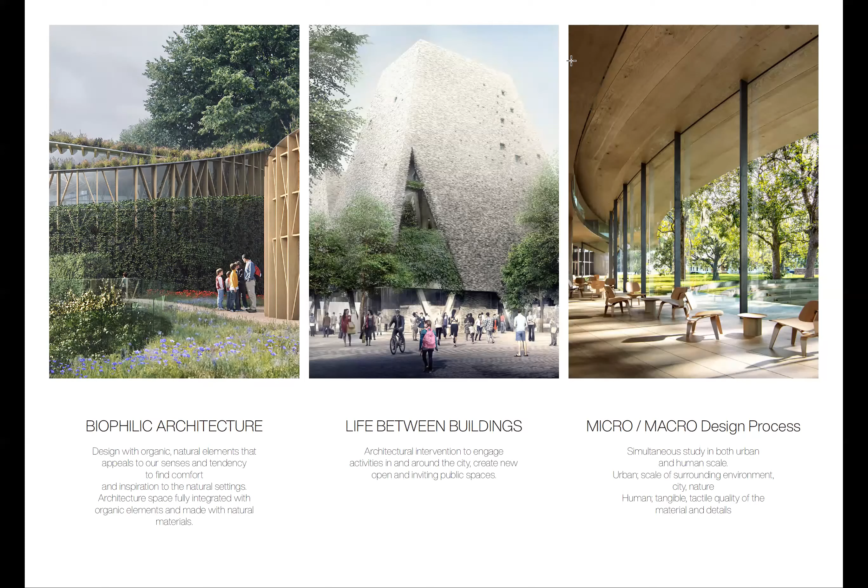The last one is this design method that we've been implementing, this micro-macro design simultaneous approach. We pay keen attention to the architecture design in such a way that it creates a firm link between the surrounding nature or the city and the life that surrounds the project site. That's the urban scale, the larger scale, that we always try to achieve a firm link and relationship to. At the same time, we explore the texture of materials and how they're applied in a very tactile manner. So this tangible human scale is explored at the same time as the concept of linking to the city and environment.

Okay, so the first project I would like to present is the new Hans Christian Andersen Museum. This is under construction as we speak, and our colleague Nicola has been sticking to the site every day and following through this very challenging time.

We've been working with and for the museum crew, which is really inspiring. The museum crew, especially Henrik and Jambo, have been a true source of inspiration in such a way that their high appreciation for architecture and understanding stands out. But how this project started: we won the competition in 2016.

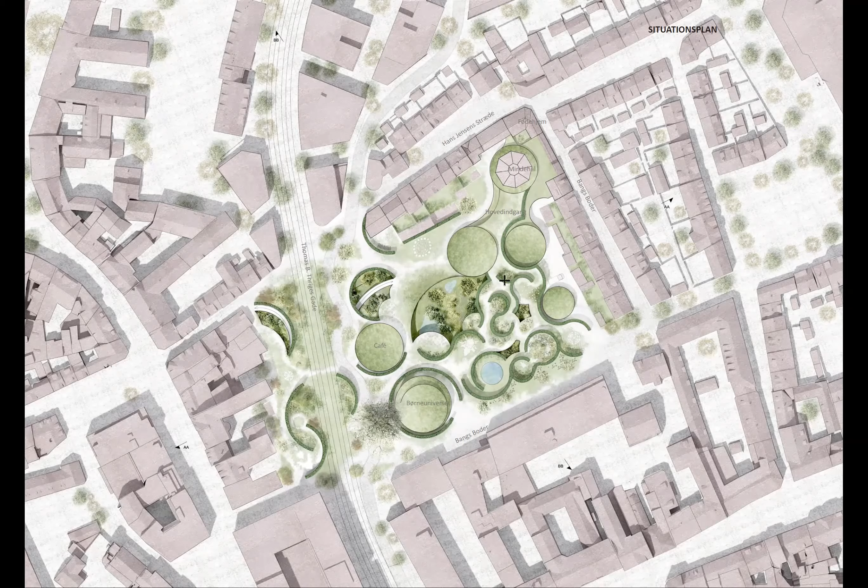So we have separated and tackled this in 4 different garden zones. The first one we call the urban garden, where, as I was explaining earlier, this fast light rail would pass through, with 2 stops - one closer to the beginning of the museum and one towards the later parts. By cutting through, one would have a particular experience of being and passing through the world of Andersen.

There are pedestrian paths and also spill-out space from a cafe and children's room, which are creative facilities for the children, along with bicycle lanes passing through.

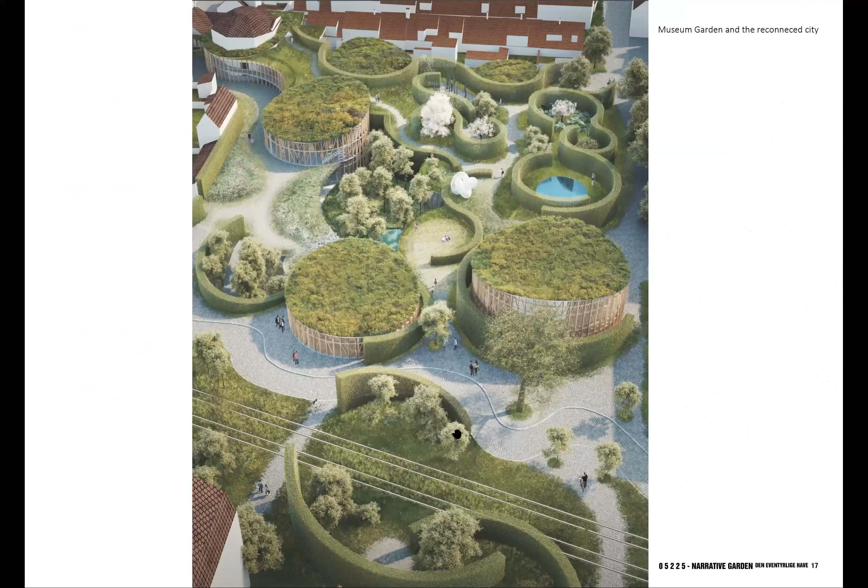And this is the overall image. Although this is a slight alteration to our proposal, we hope the end result would achieve this urban space as we have envisioned.

This view highlights that the overall zone is covered with green. There are small pavilions that pop up, providing functions such as cafe and studio, and a foyer that needs to be accessible from above ground, full of light and good quality.

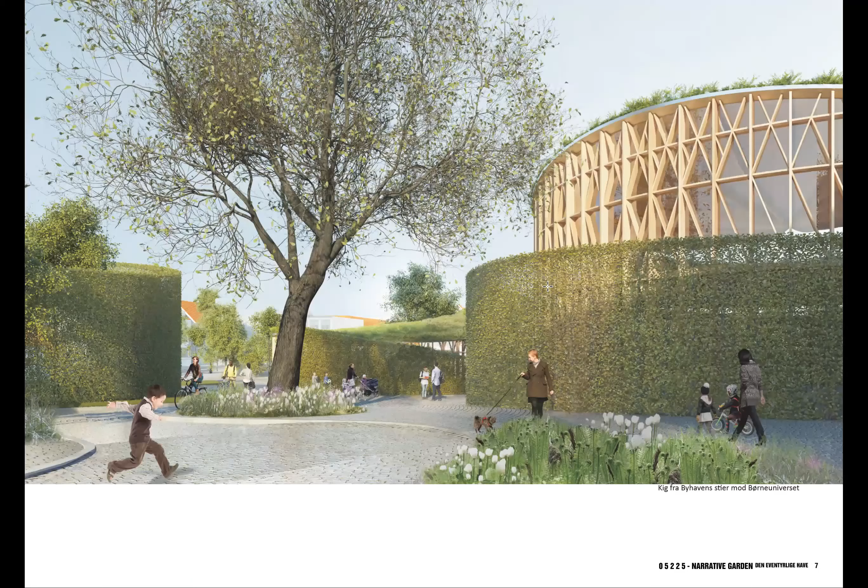This is one of the urban garden spaces where the meandering path plays a part of the experience - walking through the hedges, experiencing being enclosed by them, and catching a glimpse of the architectural pavilions.

The first, the biggest one, is placed at the prominent corner where it's most accessible, visible, and legible to the public. This is open for educational facilities or creative activities, mostly for children.

There are symbolic areas adjacent to the existing trees at the moment. A cafe is close to this path, so a garden view could be obtained at the same time.

And the entrance pavilions are open and draw people in through this two-layer hedge, leading the way to the entrance, which is adjacent to the birth house of Andersen.

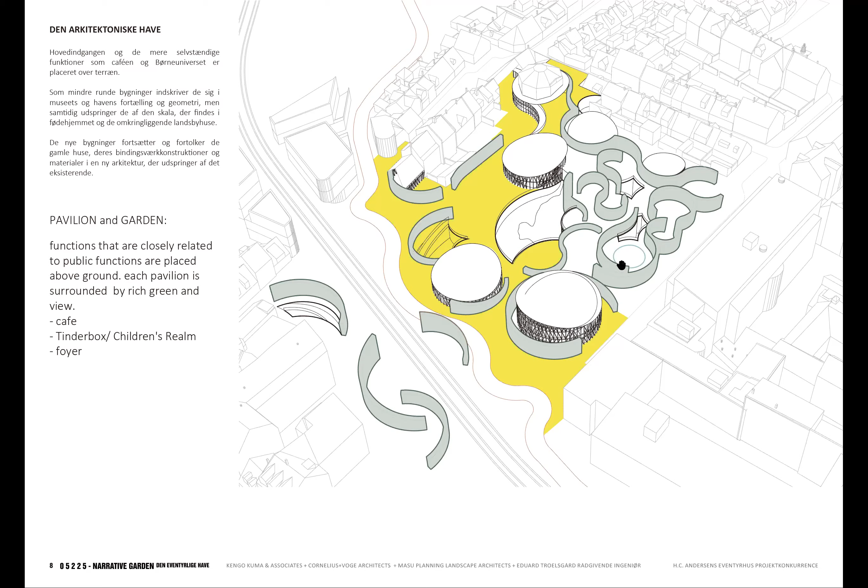So this is the layering of the facade for the pavilion. And one is the scenographic - what we call the scenographic garden.

This traces the exhibition space underneath. So again, there's this play of mirroring, or duality of opposite matter, cut and divided by the plane of the ground - above ground has a hedge that creates a maze-like space.

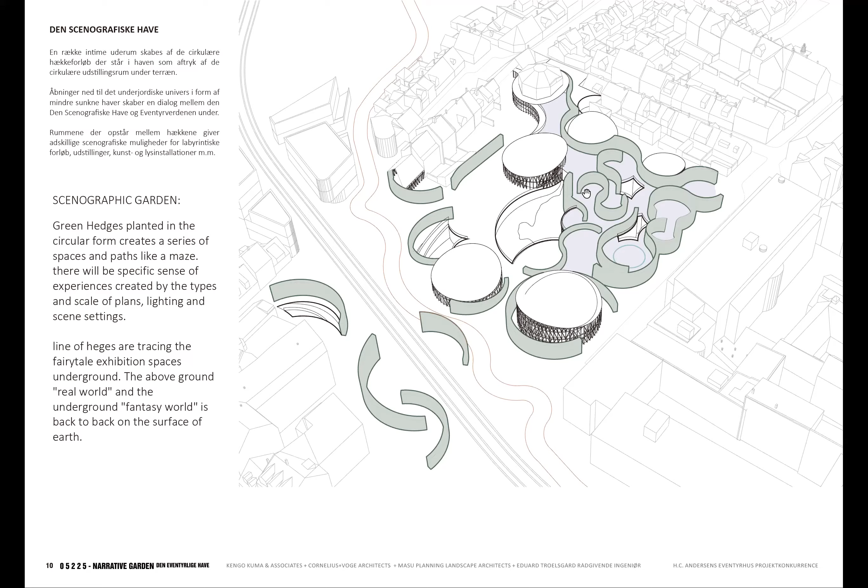Through some small openings, the aperture of the skylight, one could have a glimpse of the fairy tale world underneath. This is the effect of the meandering path.

The last is the secret garden, and this is the portal, or the openings, that connects above ground with the real world versus the fantasy world - the fairy tale world underneath.

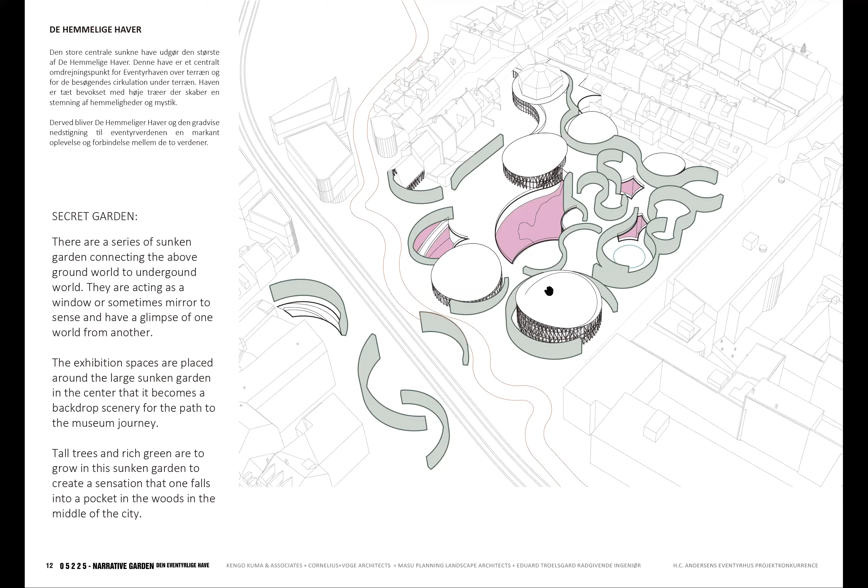This is the view we imagine could be obtained some years later when the trees are fully grown. Of course, landscape and garden projects always anticipate growth over years and years.

So the effect is this sense of being surrounded, intimate, secluded, and the visibility from above ground into the space is a bit more controlled. This creates a sense of secret garden that becomes a background to the fairy tale exhibition areas.

Very quickly, how we go about creating the volumetric and planning: with the idea of the exhibition designer, Event Communications from London, they have this concept of suppressing all exhibition space underground, which requires a lot of heavy scenographic settings like lighting and sound.

It does make sense to have that underground, with this concept of duality creating the world of fairy tale versus the real world.

So we definitely strive to follow that concept of suppressing or creating the underground world that immerses, while remaining with the pavilions that have direct access, such as the cafe, tinderbox, and the entrance pavilions.

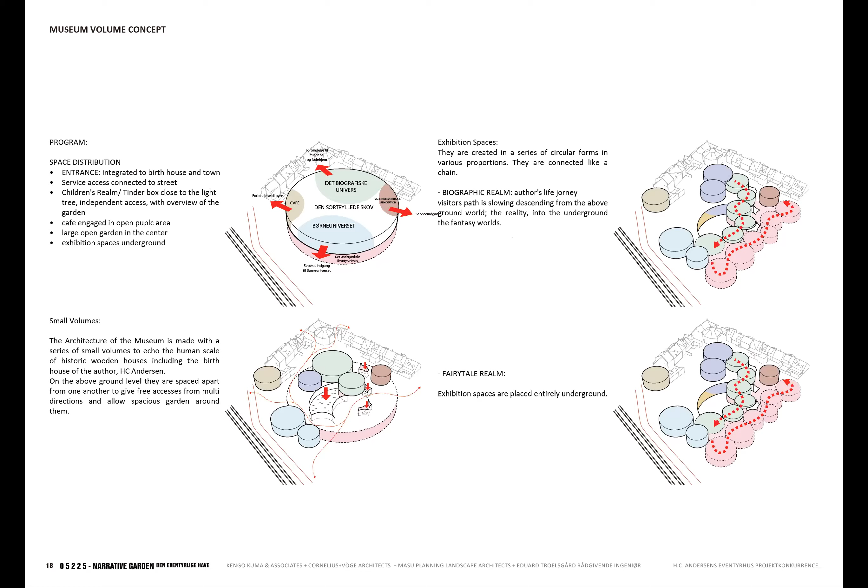What we thought would be really exciting is taking this concept of the biographic realm and the fairy tale realm, created by the museum and exhibition designer. The biographic realm is where visitors gradually descend and reach the underground world - a slow transition from the real world to the underground world. This is much about the author's life journey, experienced through meandering paths between the exhibitions.

So for the gardens, it's not just for the purpose of creating this spatial experience, but also with the full intention of offering the public or the communities a quality space - so they can come, have lunch, or just spend a day to play. This needs to be a garden where spontaneous activities could happen, offering a comfortable space for a daily stop.

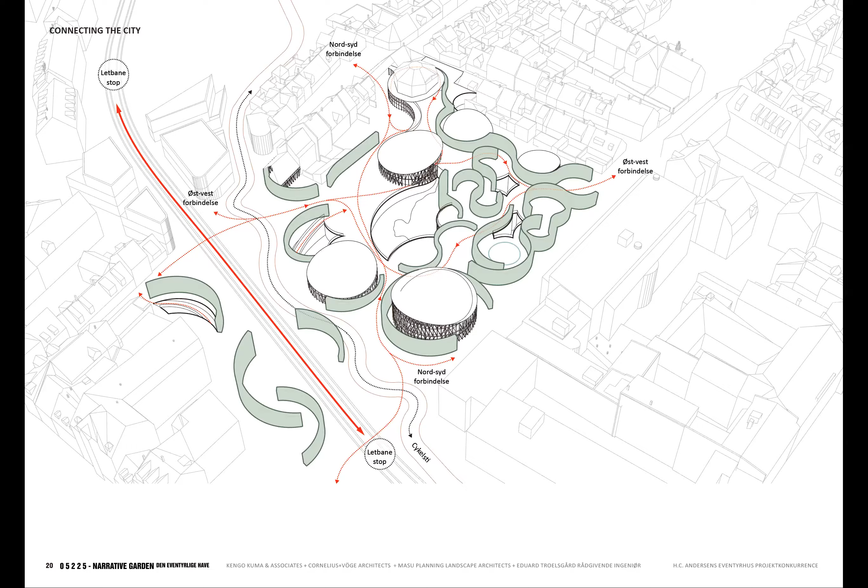So this is the current plan that we are building. What is particular is that the birth house is, of course, the beginning and end of the whole journey. Starting with the foyer, receiving the visitors, one would start with the exhibition space and visit each one by descending through this meandering ramp. Each one of the exhibition spaces is composed of or enclosed in a circular form.

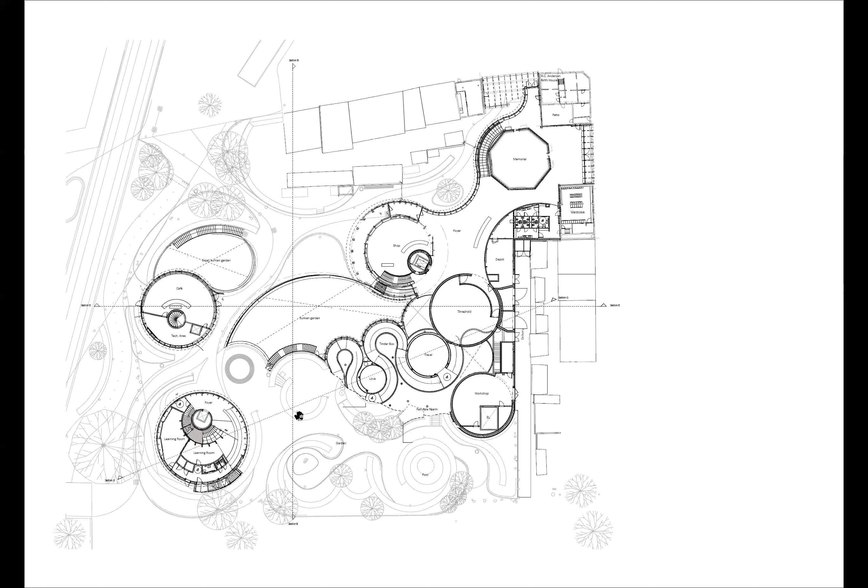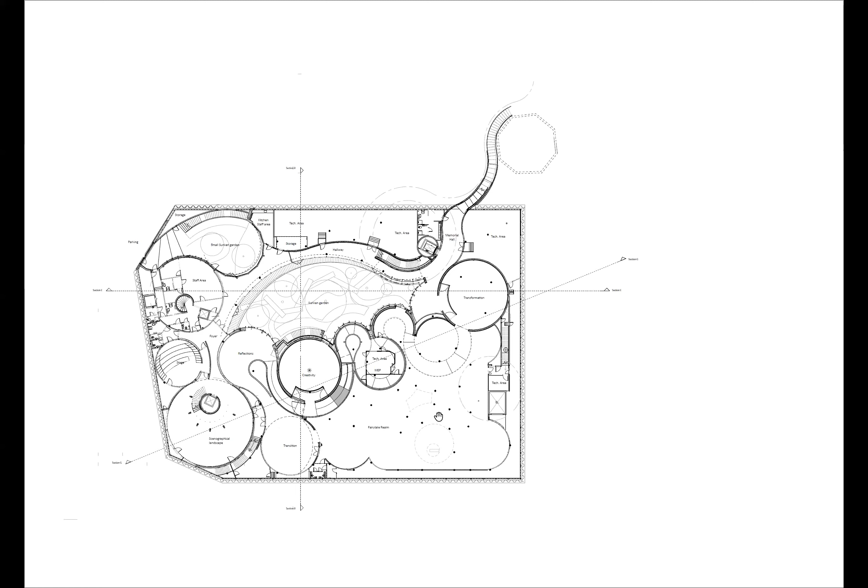So this is the view to the exhibition, the foyer pavilions and inside of the foyer. This is the full plan that shows how the exhibition spaces are composed. So there's the gradual descending through the ramps, going into each one of the Biographic Realm exhibition spaces. Once you land on the bottom of the underground exhibition space, the world of a fairy tale just expands and opens in front of you.

We just wanted to share some of the photographs that we thought start to become really interesting. The project is under construction right now, and we can see the series of columns, but the meandering paths give an effect of being in and out of one space and into another. This topography of how the space gets lower and descending, and to capture this within the circle - the exhibition spaces are something very particular, and we're quite excited about the effect of this walkthrough path experience.

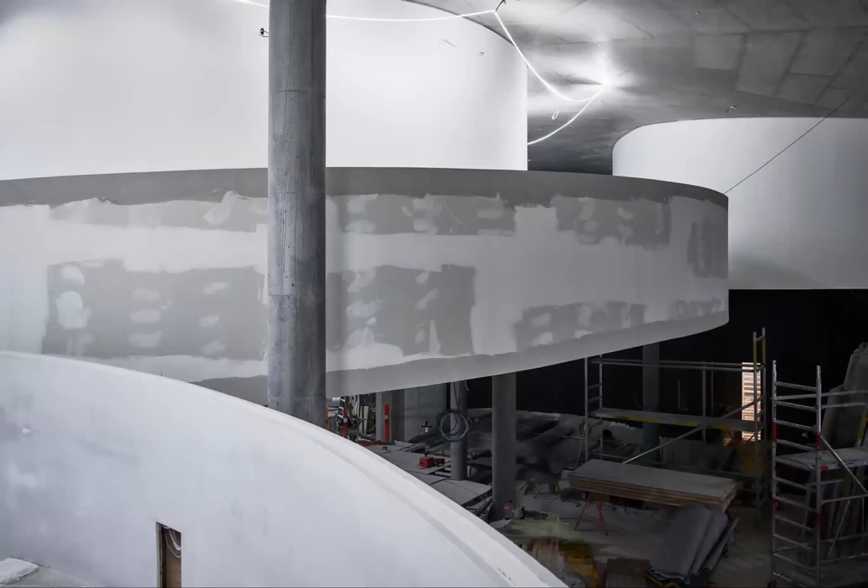The facade concept - we have been inspired by the surrounding buildings, the timber buildings that have these diagonals. So we implemented this concept of looking into the tradition and morphing it in such a way that it gives a more organic feeling, creating patterns in the form of a facade in architecture. The diagonal actually gets used as bracing to stabilize the whole structure and the facade, so it's functional as well. This is the result of applying these design patterns.

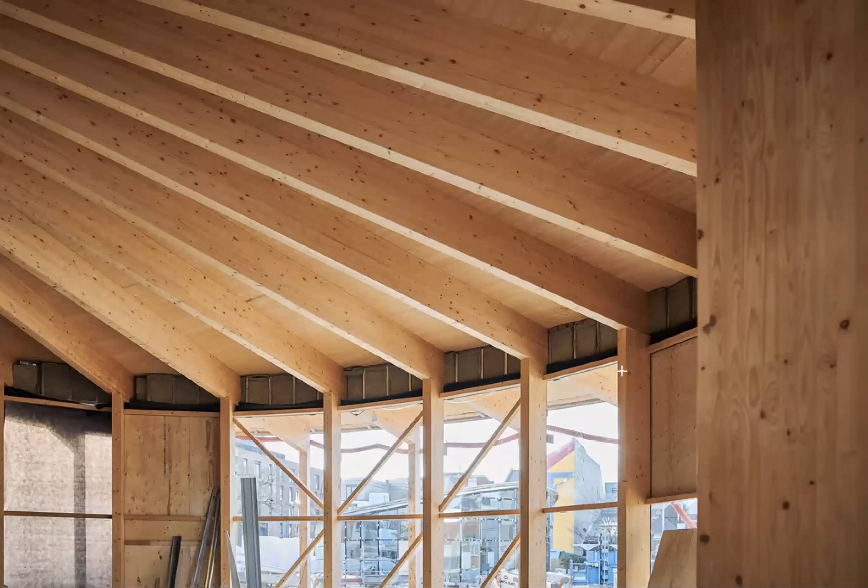This shows photos of the current ongoing construction. An overview to the cafe, and from the cafe one could obtain a surrounding view towards the urban side, as well as this three-dimensional rising ground and the meandering paths of the hedges.

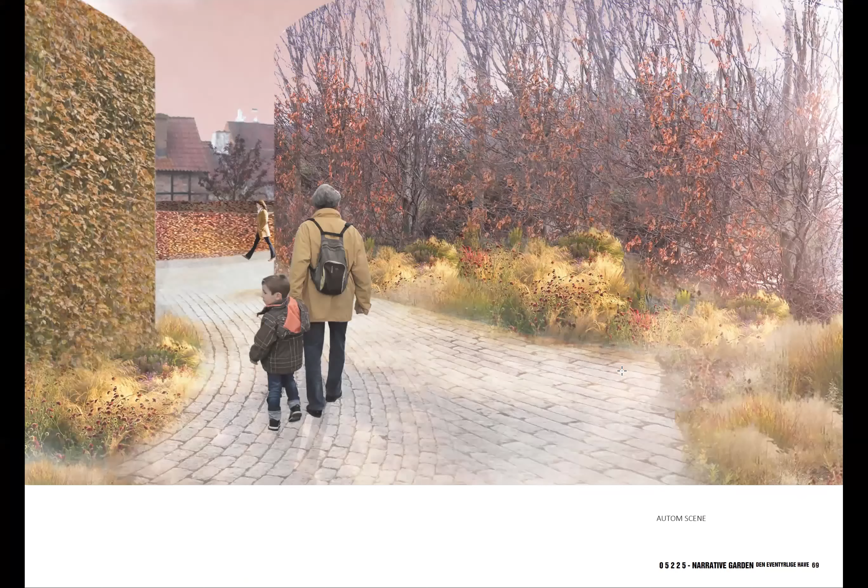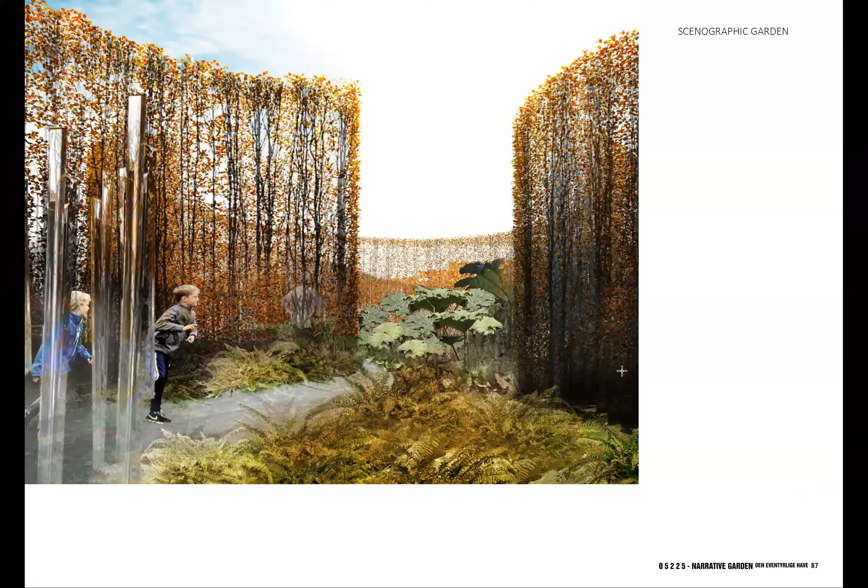So the hedge would transform itself through different seasons. In autumn, it starts to become bare and changes its transparency. There's some play with scale, giant plants, and so on, which also reflects some of the stories of Andersen. Yeah, so that was that.

Here, the element we got to work with is water. I believe this is one of the most attractive materials any architect can work with. We have tried simultaneous explorations from the very beginning, a micro-macro approach, where we really start looking into spaces in design that appeal to our senses - working with steam, temperature of water, reflections, and shadows, and how it will react with light. All this was a central theme in coming up with and deriving the architectural form.

And water, the site suggests such a significant presence. This marks up the important landmarks such as Opera House and theater, and historically it became a key point of the city's development. And Denmark has very deep connections and cultural engagements with the water.

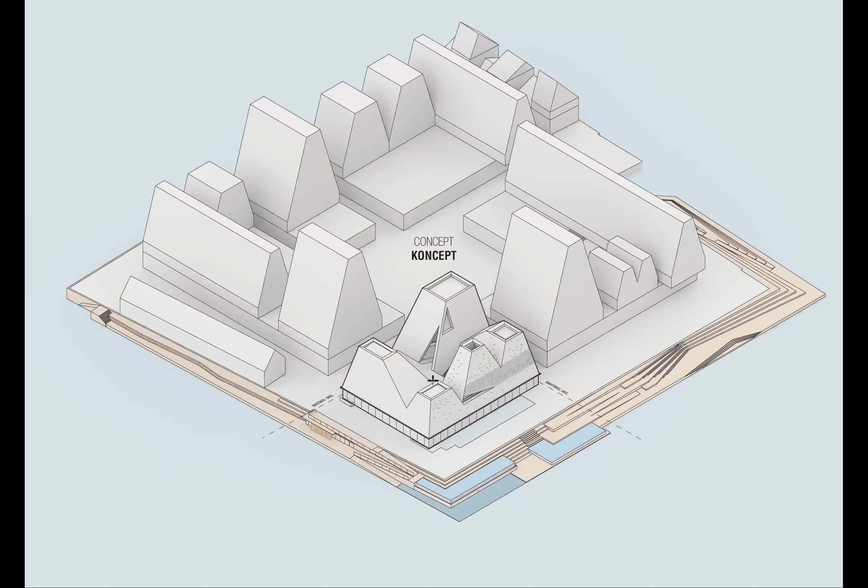Starting with the concept, this small plot was given to us to design, situated among the master plan designed by COBE, Danish architects. Our facility is situated in a corner, a very good corner surrounded by water, so our aim was to really take full advantage of that.

One design guideline put forward to come up with this shape is the sloped roof, which is in close link to our surrounding buildings, the traditional Danish architecture. So we got to play with this sloped roof and the walls.

What we wanted is a distinctive presence by having this aggregation put together in such a way that this facility suggests no front or back. It's all multi-directional and accessible through all four sides, and we have an opportunity to play with different proportions that match the activities underneath.

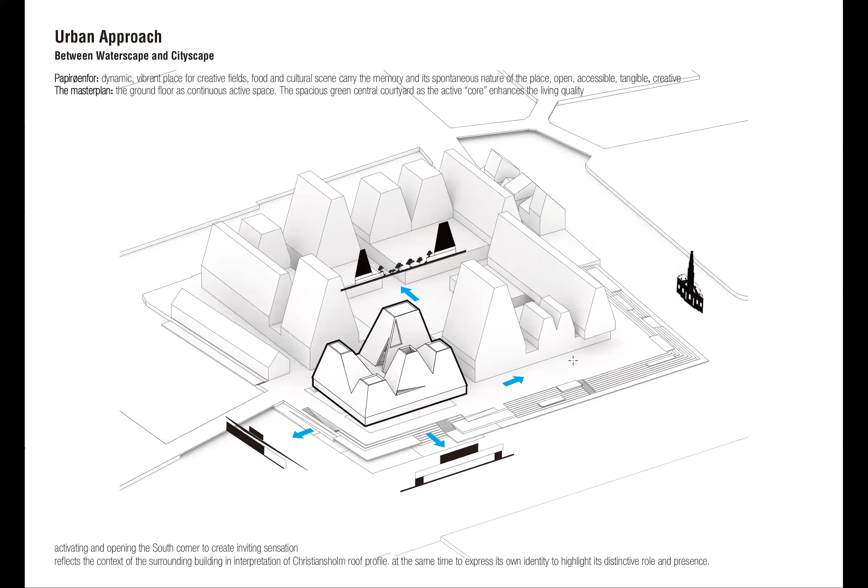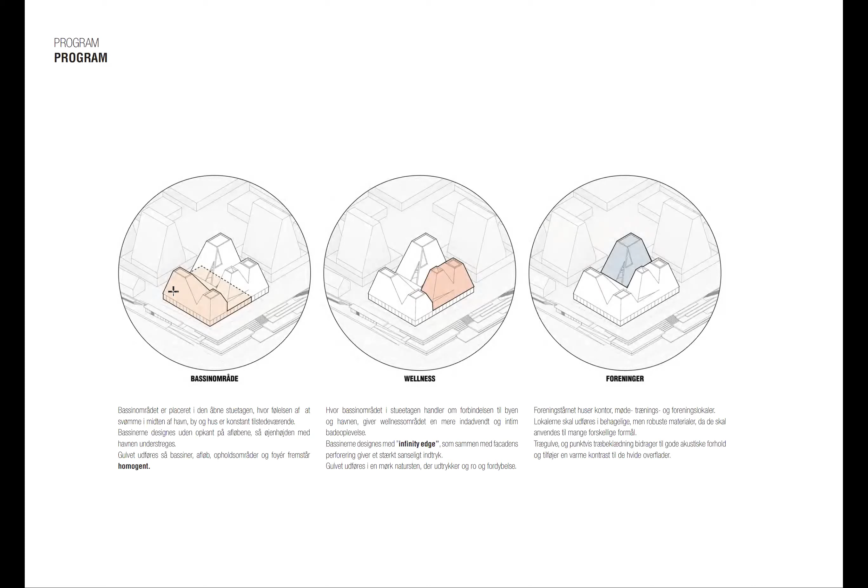Being surrounded by these two open corners, the ground floor plane is fully open to obtain a panoramic view towards the harbor. Enlarged water surface activity spaces are created on the ground floor. These two cones respond to the lengths of the swimming pool, the exercise pool, as well as the shallow pool in front.

Wellness is at the elevated level on the first floor, where it's more secluded, enclosed, and the views are framed towards a certain direction. The last is the association zone, where sports-related or culture-related activities call for residents of the community, people who live in the city, to participate.

This one is the only one that has multiple levels, and it's pretty tall. This is in response to the scale of the adjacent residential buildings.

The profile of the islands and the corner, being at the corner of the site, the master plan suggests a green courtyard that gives a really nice quality to the surrounding commercial and residential buildings. We wanted to respond to that corner and start conceptually this approach of the ripple.

The interior space gets expanded and dissolved into the surface of the water, and on the opposite side, to take the water into the ground floor activities.

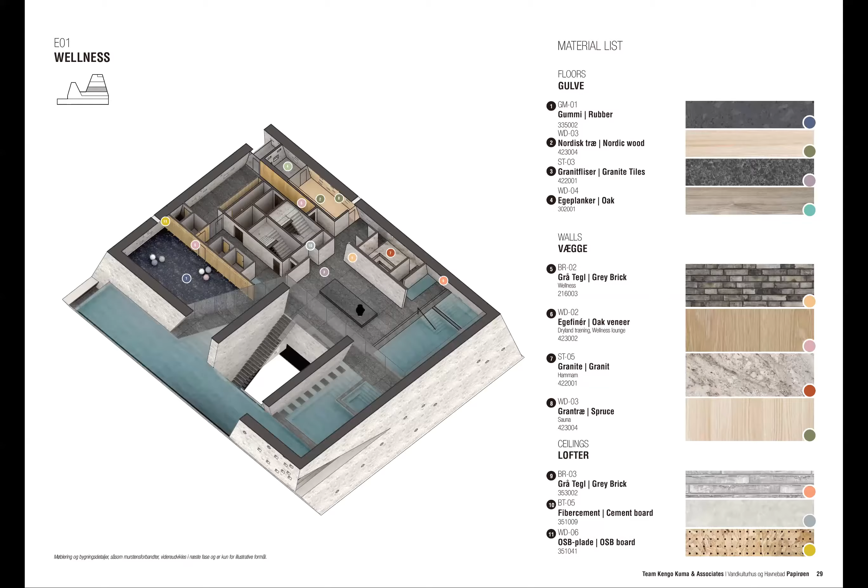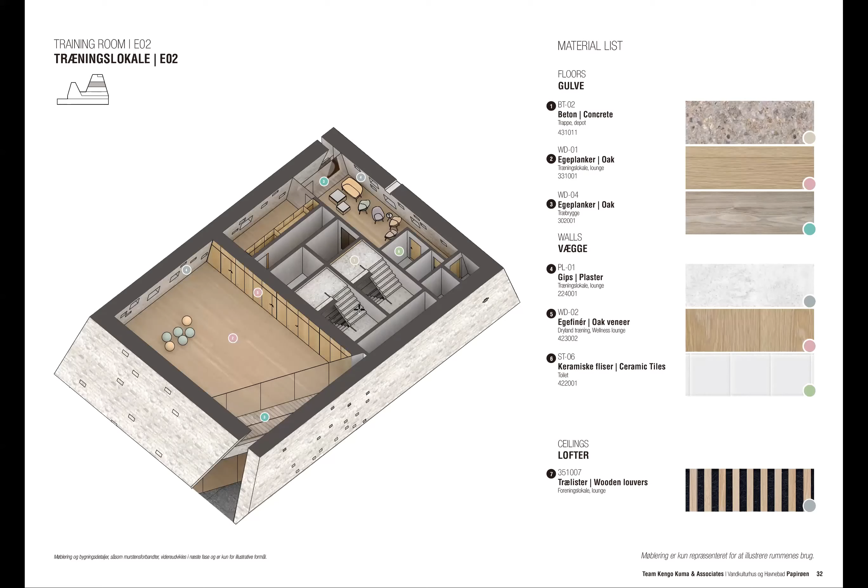This is a view from the top of the association cone, the highest cone. That's the only cone with floor slabs and programmatic floors, all for association clubs related to water. Here you can see one of these floors, a training room, with this terrace that allows access and viewing connection with the rest of the building. It's always inward, outward looking, this interplay.

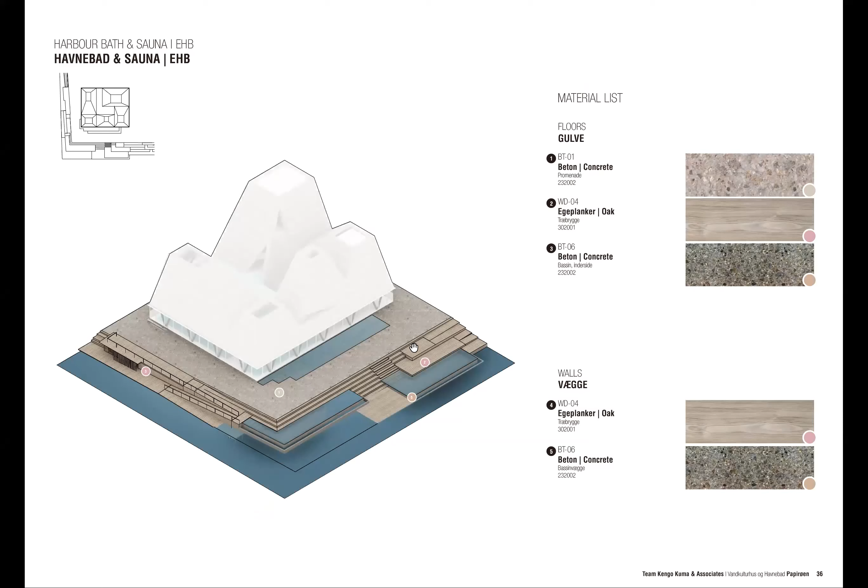The last portion is the harbor bath and sauna. The intention is that, as it's very popular for Danish people to have this harbor sauna, the sauna is an integral element of the landscaping. There will be a series of platforms and slopings, and the sauna is tucked underneath. So the sauna is located in this position, where one can walk on the extension of the roof, approaching the side of the water.

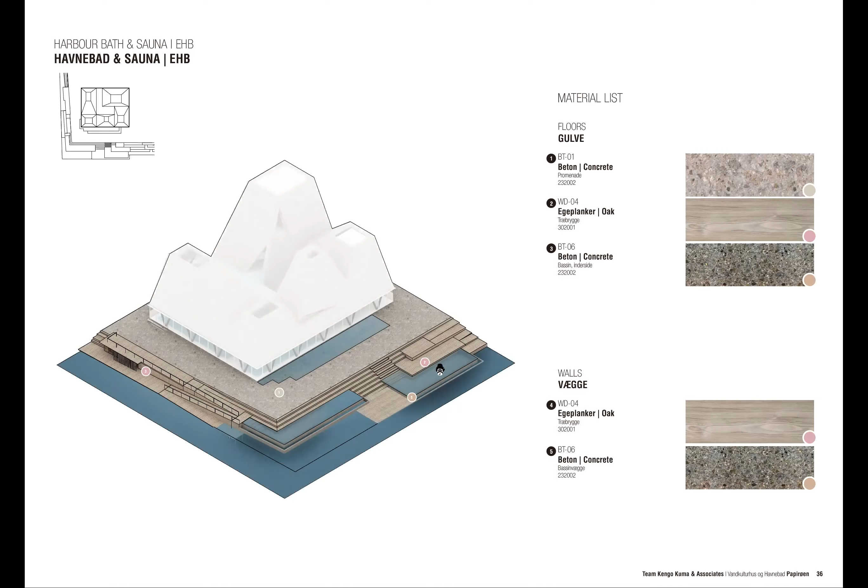This is accessible to the water of this harbor bath, with a series of bleachers and platforms. By putting it in the lower levels, it could still obtain this very clear panoramic view from the exercise pool inside, expanding out towards the harbor. This is the effect, a view from the sauna to the opera house. And this is the latest model that highlights this intent.

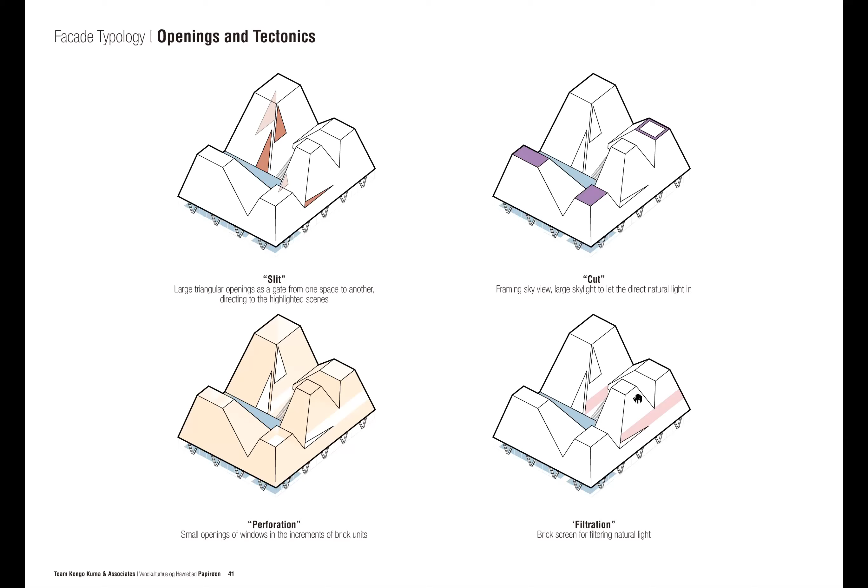We have some typologies that have a skylight as a cut and slit for marking the threshold, moving from one space to another. There's a screen facade effect that filters the light very gently. All this right now is developed with the idea of a brick facade.

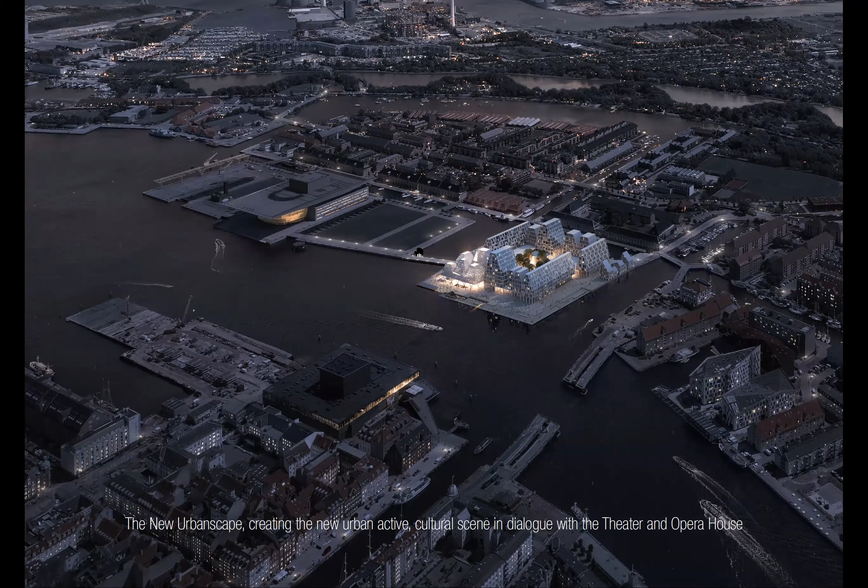So this is the bird's eye view. You can see it has this marking, in hope that this would signal the presence of the new Papirøen master plan residence together with our water culture house. This creates a new dialogue between the opera house and theater. As we speak, Cobe has just won the competition to design these beautiful park ideas. Right now it appears vacant, but this will be filled with greens and seasonal changes. It's going to be quite unique. We believe that together with this water culture house, it would create this new waterfront scene in the city of Copenhagen.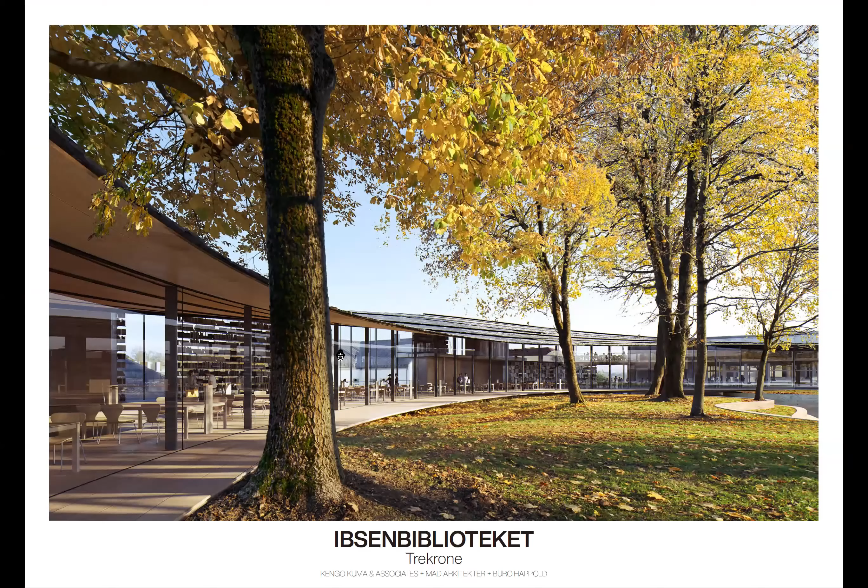Okay, so the Ibsen Library. We again started looking deeper into the writings and literature and how we are to tackle and implement the quality of that, making a link between architecture and literature. There are recurring themes - we started with the silver vein, which is also how we started making this whole architecture as the hub or the network, this running flow in the architecture planning. At the same time, recurring themes in Peer Gynt, for instance, these crowns and trees that symbolize verticality, unattainable goals, and so on. That has been considered in the planning aspect, as well as how the architecture would present itself in the city, making a new intervention together with the activity around.

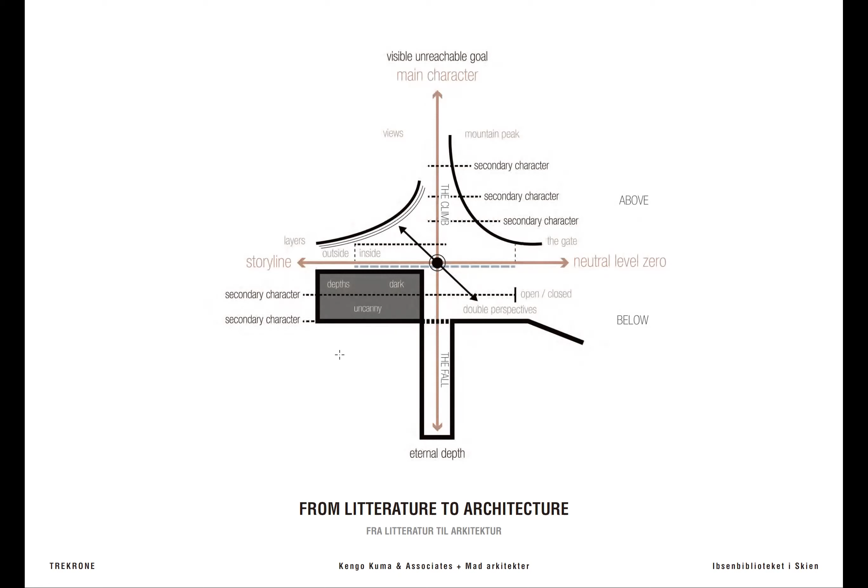Mark: Just to pick up on what you were saying, and also what we were talking about for Andersen - obviously the greatest source of inspiration was jumping from the literature and how this can be translated into architecture, not in a literal sense, but reinterpreted. The Ibsen universe is so filled with all these different elements - the ambiguity, the high climb, the downfalls, all the different characters, the mountain peaks, the double perspectives, the highs and lows, the compression, the cave, the borg. In a way, we try to extract from this what can be translated into the building - the falling heights, the compression and decompression, the horizontality and the cave light. That's something we'll see in the development in the next pages.

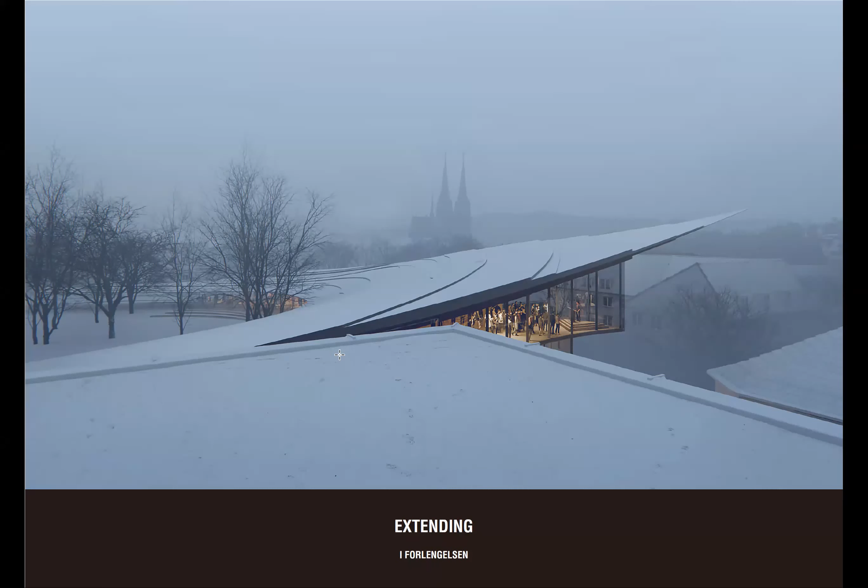Yeah, so this is one of the images that highlights the face of the library towards the city side. You can see it in close relationship to the silhouette of the churches behind. This particular setting in snow gives a warm light leak through and gives a stage-like presence towards the city.

So this is one of those projects where the form has really derived from a close analysis of the site, in relationship to the city and to the surrounding facilities. The Ibsen House was one of the main focuses in deriving the form of the architecture.

So in the first site visit, what we did was walk around and see the flow, how one approaches it, how the visitor approaches from the city side, from the other ends, and so on. We made traces of this movement.

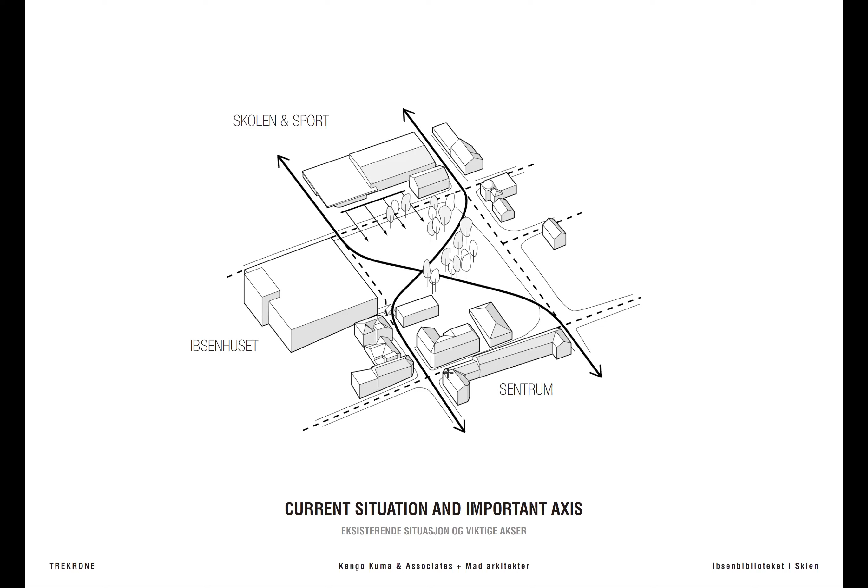This site also has very beautiful trees that make the park so special, providing foreground and background for a perfect library setting. Right after the site visit, we went to the cafe and started doodling on how to frame the library, how it could take its form by preserving the maximum amount of trees, and to create a firm link with maximum openness and transparency from the library to outside and outside in.

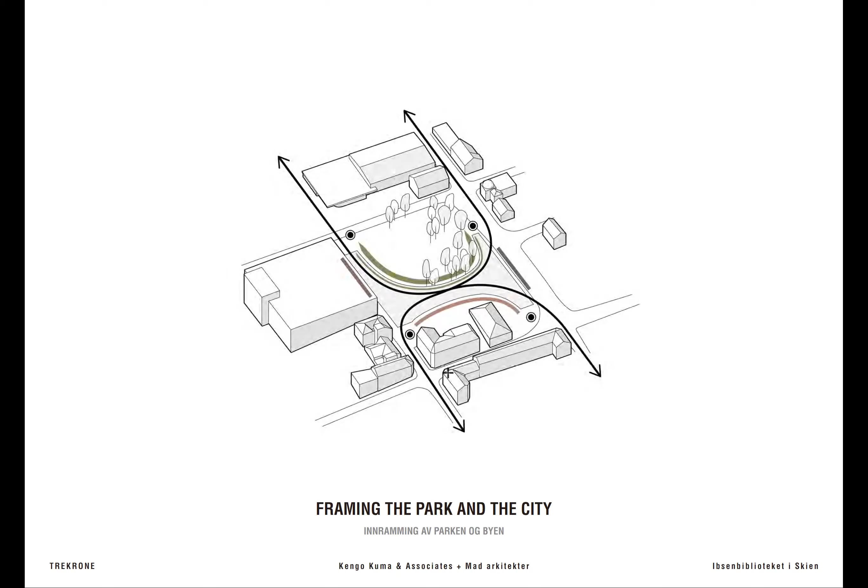So this is the result of the form, analyzing the flow and circulation and approach in relationship, and also how we can embrace the nature of the park.

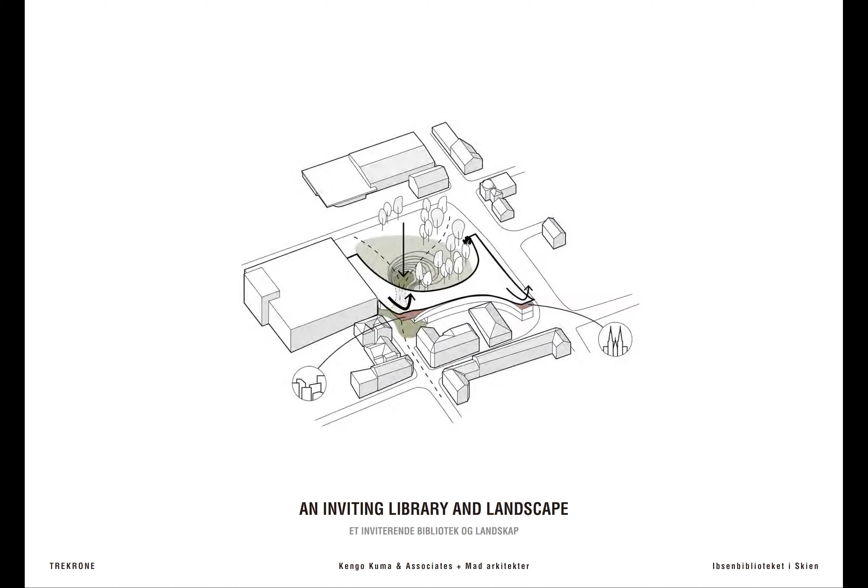From there, we started manipulating the form by lifting this end so that larger apertures are created and a presence is announced towards the city side, and really lowering it down to relate to the scale of the park, very human scale, very low rise.

The last is the relationship to the house. What we tried to do is create a firm connection and common use, a quite natural flow in and out from one facility to another.

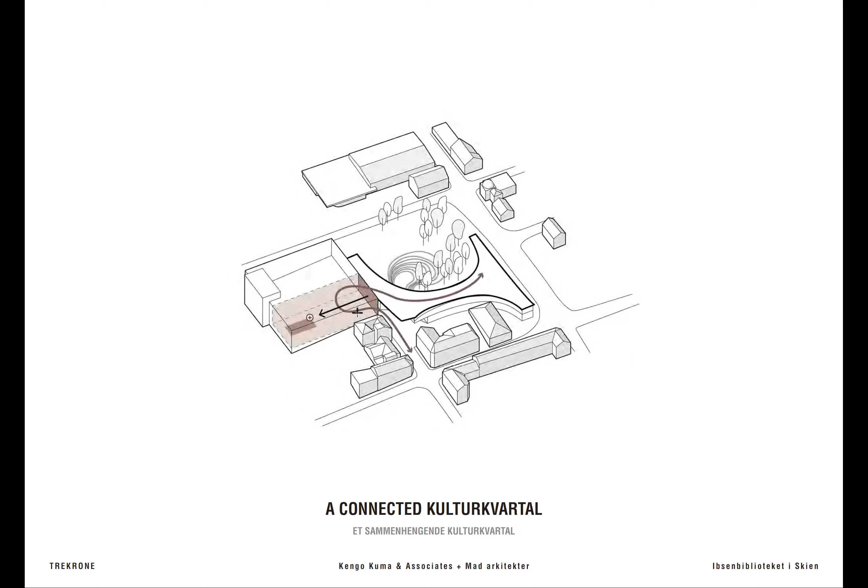So it was like a very close marriage between these two programs, which together makes an even far more active cultural ground, we believe. This is in aim of expanding both presences.

So another big move that we've done is to recreate this topography so that by walking through the park, one would naturally find their way to the other side of the city, which currently is a bit of a clogged space—the connection is very minimal in terms of how one moves from one end to the other through the park.

So this creates a new condition, but in a way that this excavation is sort of gaining back the original state of the topography. We thought it's a good statement—the large aperture to the city and firm connections, as well as offering an opportunity for creating a theater scene outside.

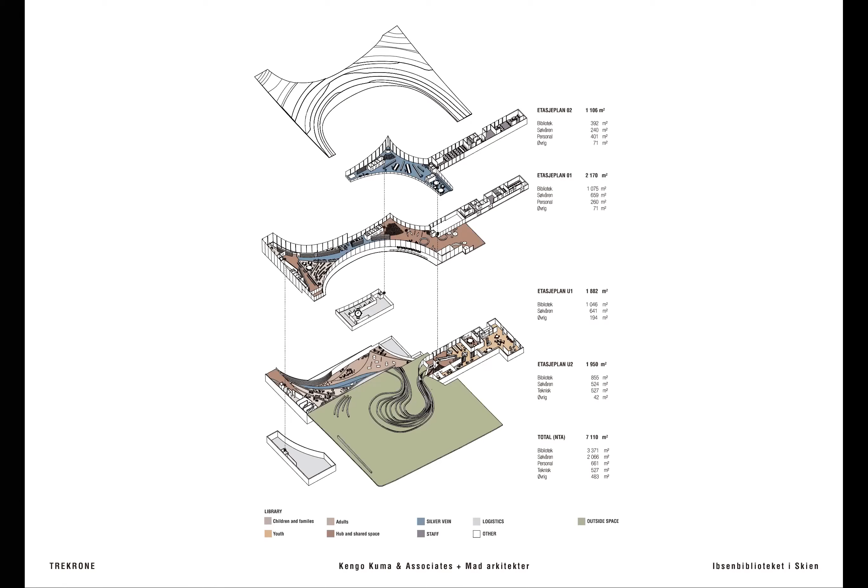In a way, we always have access from all the different sides of the site and all the different levels. The site is not totally flat—we have different levels, as you can see here. So we always try to drag the visitors in from any side.

Going in, it's literally the silver vein guiding the different functions. You'll have this meandering path throughout the project, on all the different floors, that will be like the guide of all the different functions. You go through this silver vein that will be mostly showcasing Ibsen's universe in very different mediums, ways, and platforms, and through this you will get to the different functions.

If we go back to the planning, yeah, so what we see here is the ground floor.

So as I was mentioning, you can see the dialogue with the Ibsen house and how the program spills out into the Ibsen house and merges in a very intuitive way. You can see the compression and decompression of the spaces, and how there's always this narrow meandering program that moves out to allow for bigger program, bigger audience, and bigger functions happening there.

You can also see what we call in Japanese the engawa, this extension terraceway that creates a transition between indoor and outdoor to relate with the park. Here's the kids area that spills out into the park. So there's always this dialogue and blurred lines between indoor and outdoor in good season.

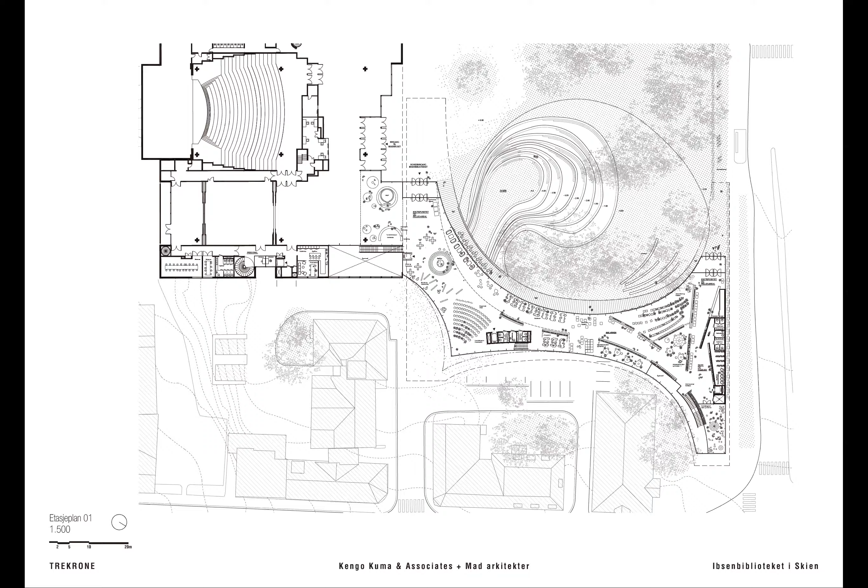So this is the engawa experience that Mark was mentioning. It's a typical Japanese way of drawing the interior to exterior and vice versa, having an extension reaching out to the exterior. This reading area is more comfortable and fully open to an exterior path - it's between books and the city, we call it. It's one of the quality spaces surrounded by fully wood natural elements.

The upper part is rather a flexible part where one could imagine small meetings or reading zones, studies, but it could relate to some studying activities or office activities, accessible from some of the service area as well.

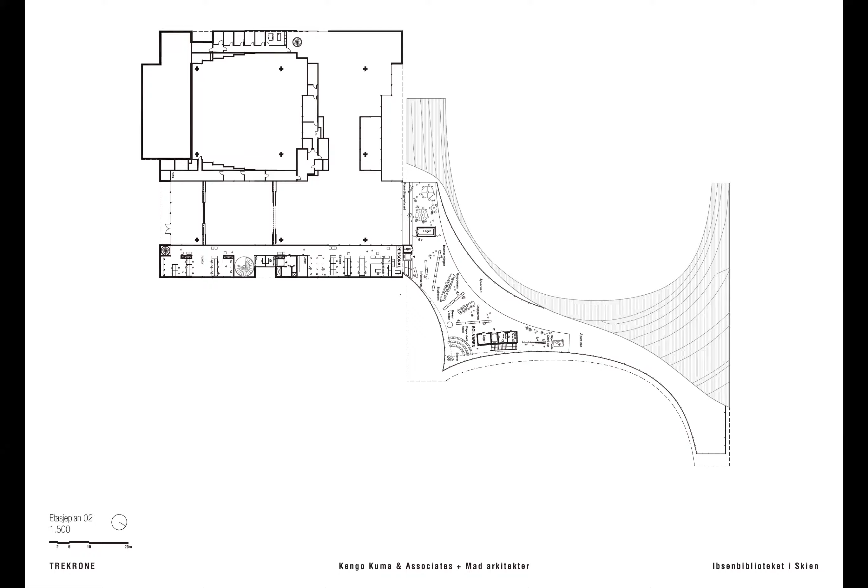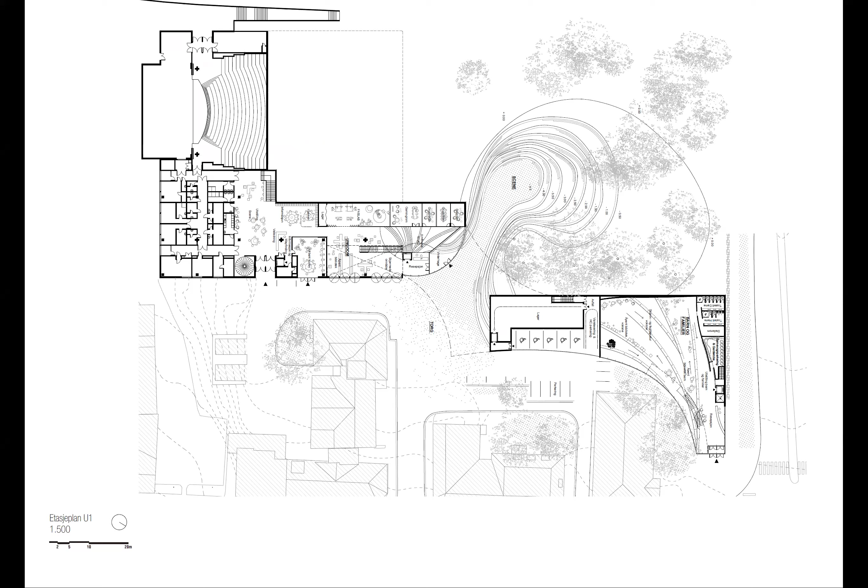This shows how the underground reading area, the library zones, are created a bit differently, despite this landscape that erodes and melts into the ground level on the other side of the site. But since this is a bit of a submerged experience, the lower levels of the library zones have a rather cave-like experience.

The cave-like experience is composed of a series of ramps that connect the platforms at different levels, and these are all surrounded by books. This creates a different experience from above ground to underground.

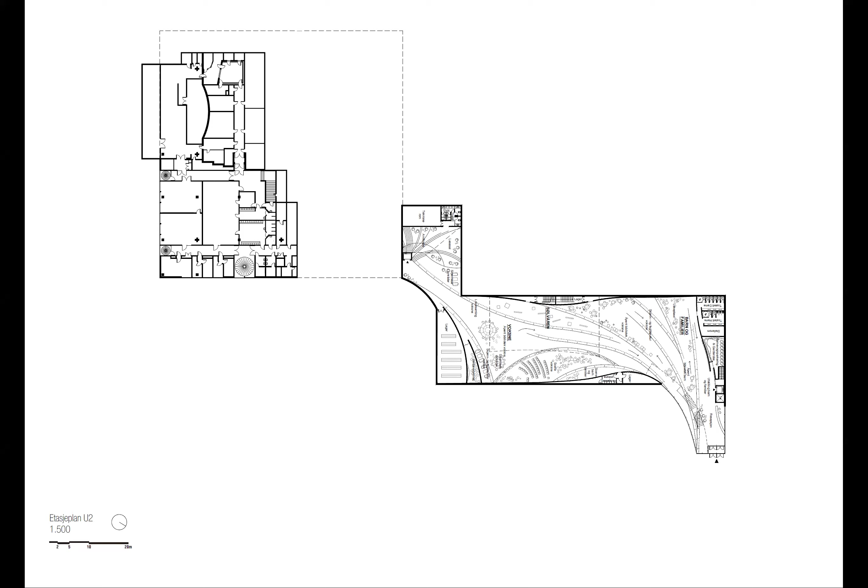These elevated gardens are visible from the lower end as well, and this also offers an opportunity to create a stage for theater settings and scenography. This is how the plan would work in more topographical arrangements - again, it's an open floor plane, so there's no solid partitioning and so on. That's the core of the planning concept.

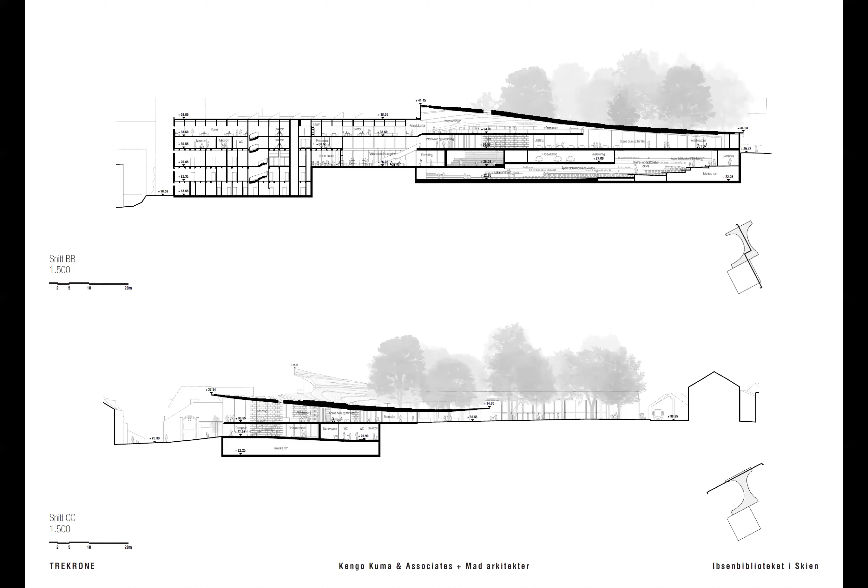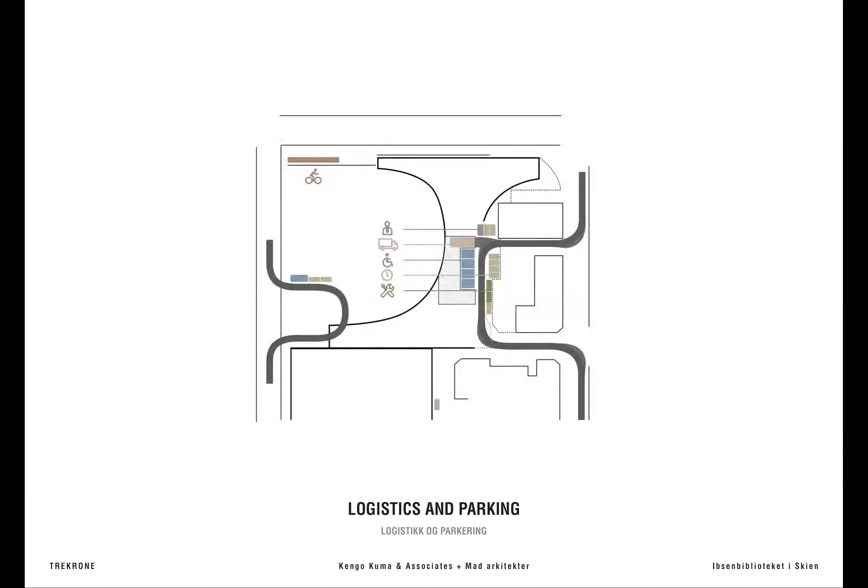Yes, Mark, you want to take this part very quickly?

Yes, very quickly. So this is showing the different accesses for logistics and parking. We're trying to keep the cars as far away from the building as possible with minimum access. What we see here on the right-hand side, on the lower side of the building, is the disabled parking and then the delivery services with very little spots for fast drop-off and fast track parking, and then cars go in and out.

And here on the left is the main access for the Ibsen house and also the higher level access for the library.

That's an interesting part of the building, where the client requested to have the building as open as possible. So open, it's like open 24/7 basically, with very little areas that will be locked, for security reasons. But most of the library will be open to the public 24/7. It's really considered as a home, rather than a library.

The silver vein is really spread throughout all the different levels of the building, and it's the spine that leads the visitor throughout the journey. The park activation shows the potential for outdoor activities and indoor performance activities. The main core of the project is not only a library, but also has performance potential in every part of the building. Program can spill out.

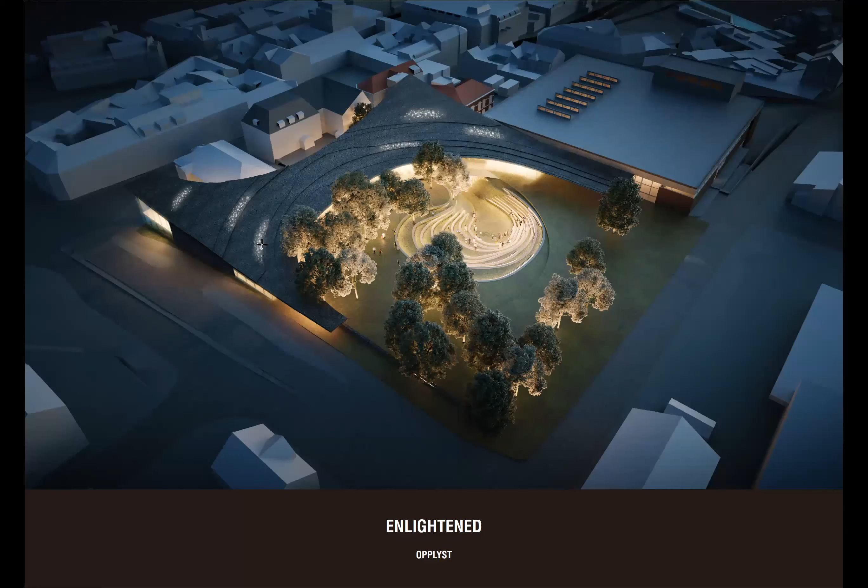This is the result of all this design process. We hope that this unique form of the building relates in a firm way to the surrounding environment. The roof design relates to the tradition of a shingled wood roof, echoing the scale of the library, or even the pages of a book—like leaves of trees, with fragmented surface textures that we believe would be beautiful to play with to cover the roof surfaces. Through subtle openings of the roof, the skylights give a warm leaking light effect that works like a lantern in a park.

That's the end of our presentation. We are hoping to start the collaboration with the library people very soon. What has been very attractive for us is the intention and dedication for a public space and democratic aspect of the program—the intention for the library to be open 24/7, and access given freely to residents around, owning keys and part of the storage. This is something very new to us, for a Japanese or French context.